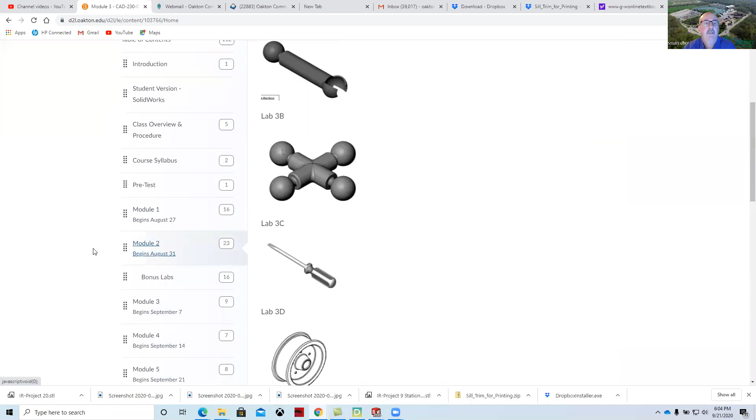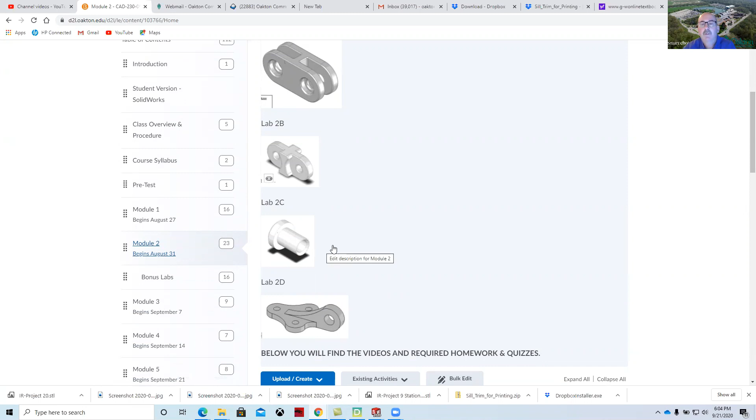We had a meeting last week and went through the Module 2 exercises. Module 2 is Chapter 3, and those projects are due today at 11:30 p.m. Let me back this up a little bit. Module 2 consisted of these chain link parts. I actually thought they would attach to this piece when I first looked through the book, and thought this was some kind of tether, but they're not. It's used later in the book for an assembly. In Chapter 10 of the textbook, it goes into bottom-up assembly techniques.

So I've received almost everybody's submissions. You should be turning those in under Assignments and under Module 2.

If I switch over to a student view, under Assignments, Module 2 is due September 21st at 11:30 p.m. If we click on that, you'll see how the rubric is set up. Most people are doing just fine. Some people are confusing some of the file names. You'll want to pay closer attention to that because it's important as you get employed in this field.

Geometry and sketching: people are doing a great job fully defining their sketches. It's not always easy. If you have a couple of blue lines, it's not the end of the world, but most of the industry favors people who have their sketches fully defined—that's to say most of the manufacturing industry. Some of the more creative types who are modeling and prototyping might not think it's that important. And then in general, can you apply features, are you using the proper techniques? People have been doing a good job with those.

You can submit those, and if you want to submit the bonus questions at another point, I see them pop up on D2L—it gives me a flag telling me there are additional submissions. I'll be happy to go through and evaluate those. So I've gone through and done the evaluations.

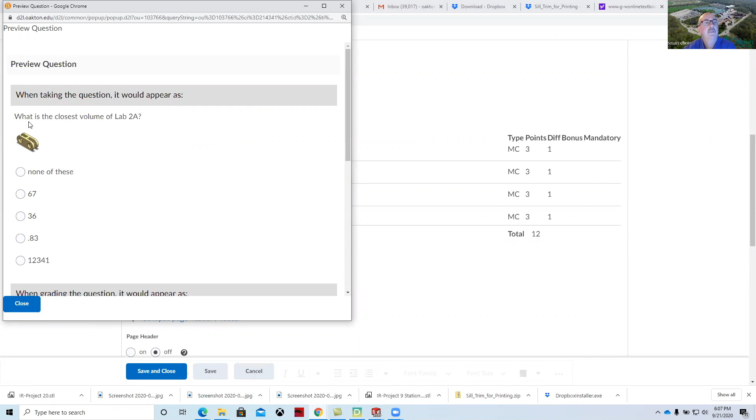Quizzes: the quizzes for the chapters had a bit of a glitch in volume analysis, so I talked to Sebastian about that. We went through and redid the questions because they were not mapped to the right part models. I've changed it back to teacher view so I can show what I did. The multiple choice quizzes are fine, but for the volume quizzes, I needed to make sure they matched the drawings. So I've gone in and put a picture of them and updated the wording to say what the volume is closest to. We look at these, determine which answer is correct, and put that in there. This was the first go-through fixing these.

I also fixed them in Module 3. As you go through and start taking the quizzes, please send me an email if you see something wrong—I'm not always able to find the mistakes, but I did go through and correct that. The quizzes for Module 3 have volume as well, and we've updated those to values that should be workable.

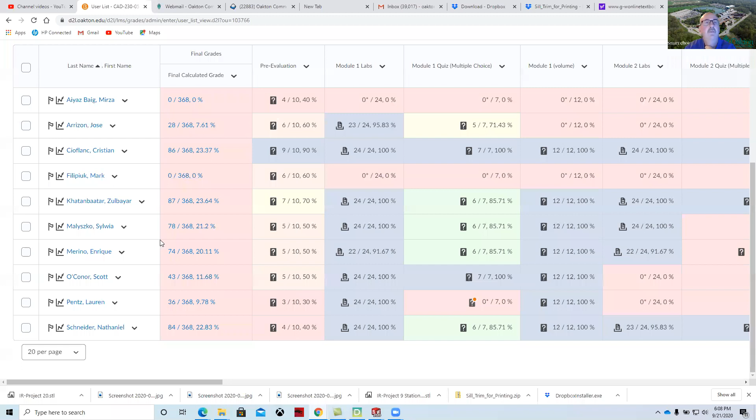If not, we'll fix them. Also, the grades. As we go through and look at the grades, everything is kind of in this pink zone. I'm going to rework these so we don't have these numbers giving everybody the impression of waiting till they get all 368 points.

As we go through and work with this, I'll streamline that. But you are getting the course feedback. If you've gone and done module 1, 2, and 3, or at least 1 and 2, you should have grades posted and scored for you. Just a couple of people haven't gotten a couple of things in, and if you have any difficulty, let me know.

As far as module 3, it's due next week, and it goes through revolves and mirror functions. This is also used later on in the chapter, and this bottle is bonus, it's not required.

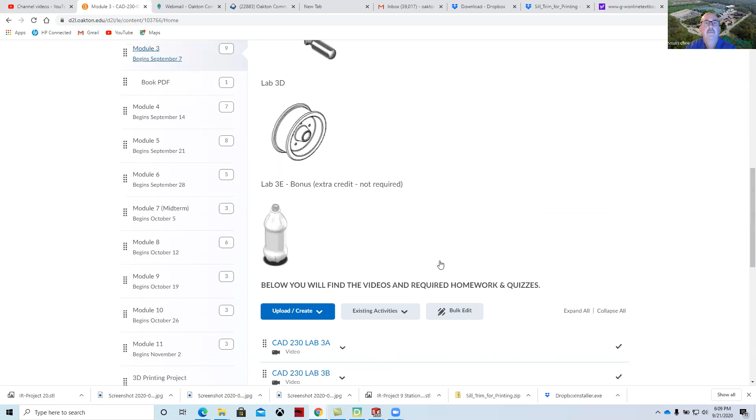And then I've added, under content for module 3, a number of... oh, I'm sorry, not in module 3, there wasn't any bonus questions. That's for module 4. But all in all, if we take a look at those part models, we would start off by revolving these different components.

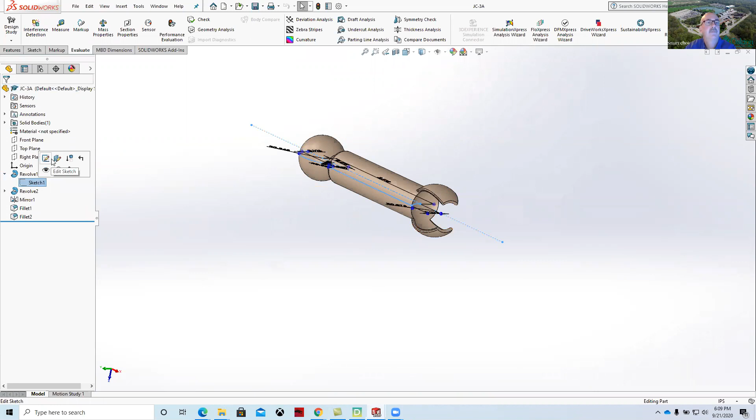Create the sketch. If we want to edit our sketch, we can take a look at that. Spacebar, normal to. And you can see our goal is to fully define the sketches.

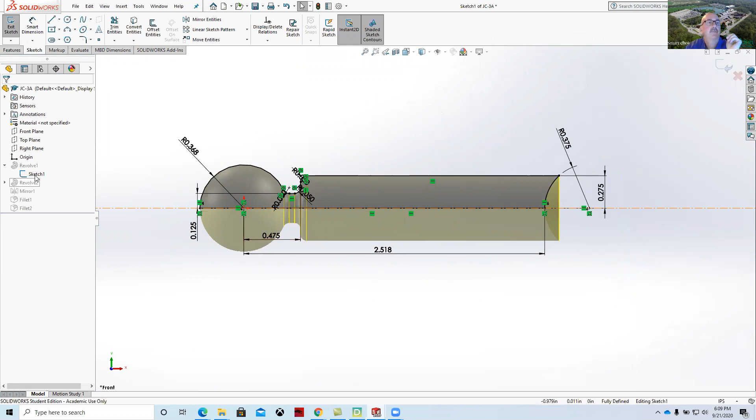Use the revolve to revolve the part. Then create this geometry on the endpoint right here. And then we'll mirror that and add the fillets.

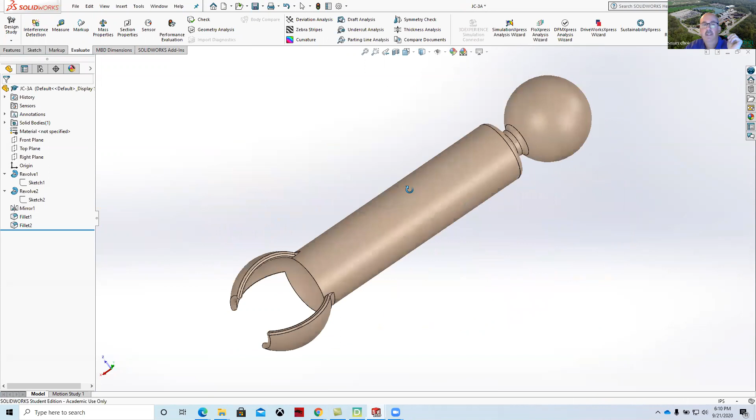It's pretty much straight by the textbook as we go through and work with these. If you have any difficulty with getting the textbook, I have added a few more chapters so that if you are having some difficulty, sometimes with the pandemic and the bookstore closed and the mail the way it is, I can help you with that if you need some assistance.

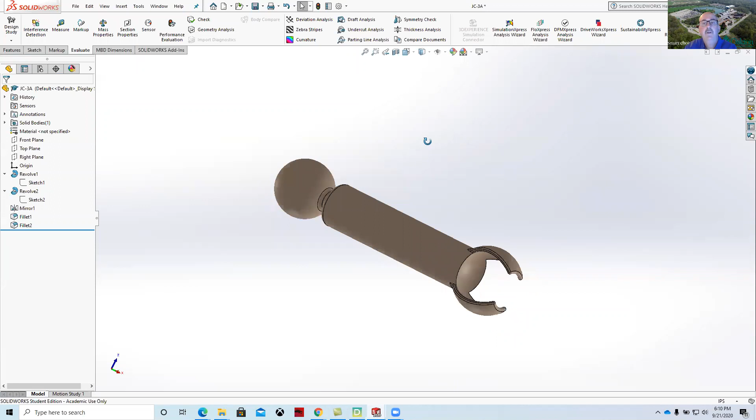So for next week, you're to have this part created. And if we look at some of the other parts, we'll want to do this one as well, along with our handy dandy screwdriver. I kind of like this project right here. You're welcome to customize it.

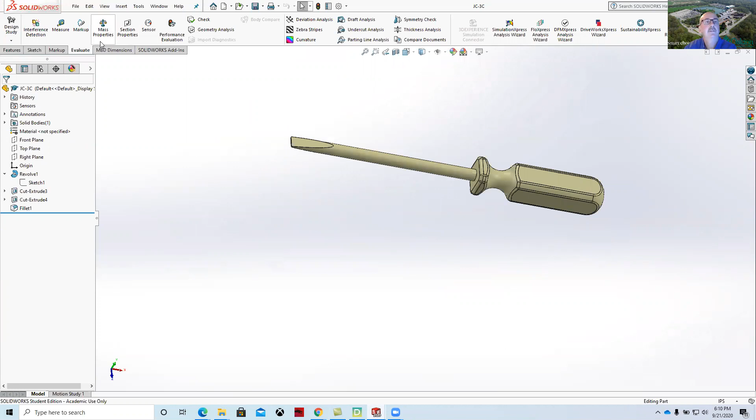Do the volume calculation by going to mass properties, and then the mass properties will calculate the volume based on how you have that modeled. That's typical for SolidWorks Associate Exam content. And as we get closer to taking that SolidWorks Associate Exam, if you choose that option, you'll be prepared for that. Again, this is another example, textbook example of how to use revolves.

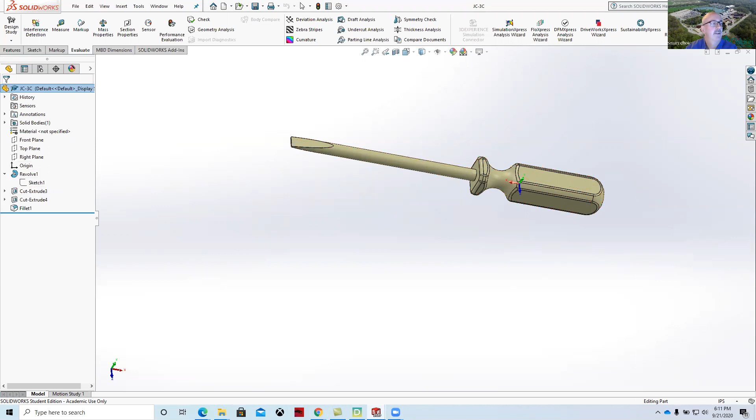If we go into it, I have to get out of this other command. Again, you want to fully define your sketches. I think the only difficult part on this was this tapered end over here with the cut extrude, because you had to create this geometry here, and it's not real clear in the textbook that you have to actually cut it.

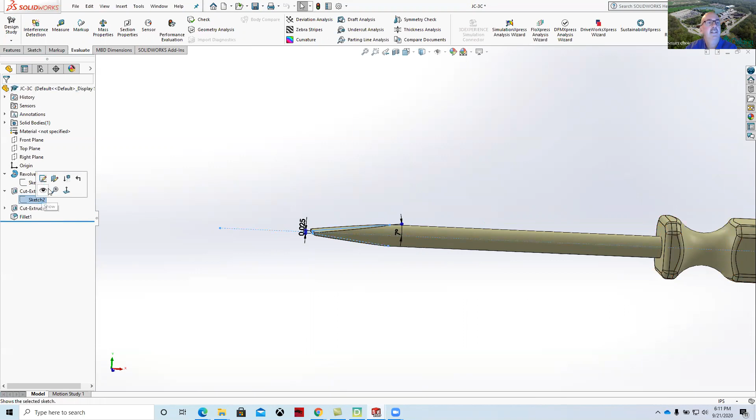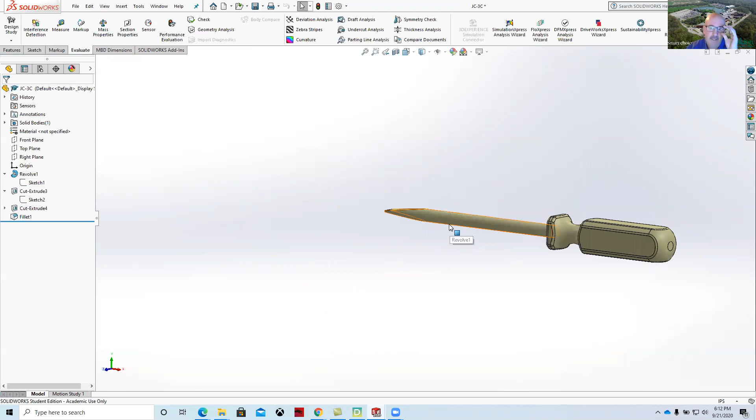So you can create this cut in this manner, or if you want, you can close this line out and create a boundary shape outside, like two triangles, that will also cut it. So that's the screwdriver. If you'd like the handle 3D printed and make your own, you're welcome to. I know I made my own screwdriver back when I was in vocational metals back in the 80s.

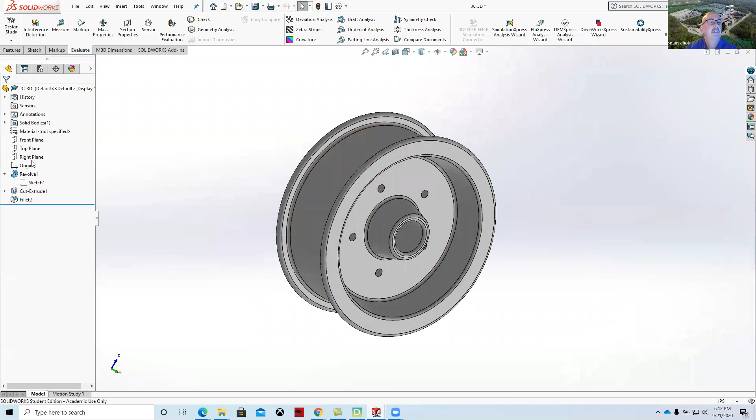And then lastly, the pulley assignment. This is another example of a revolve as we go through and work with these examples. And my SolidWorks is just giving me a hard time today. I'm not sure what the deal is, but I'll make it do it. Maybe it's going to win tonight.

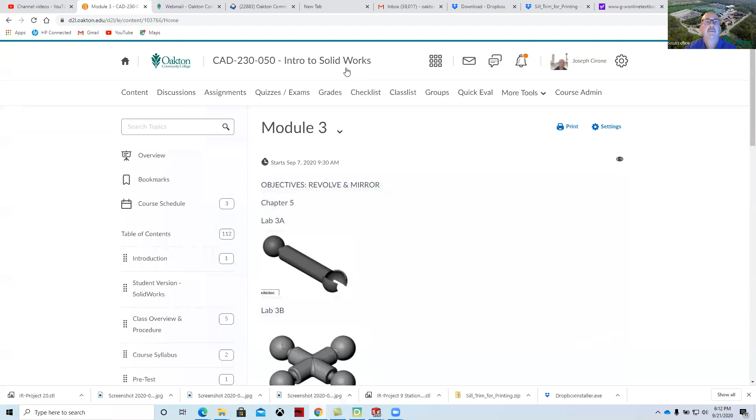All right, so that's a recap of the work in progress and the projects that are due next week. Other than that, I'll return back to the main splash page here. And we're pretty much moving along on schedule.